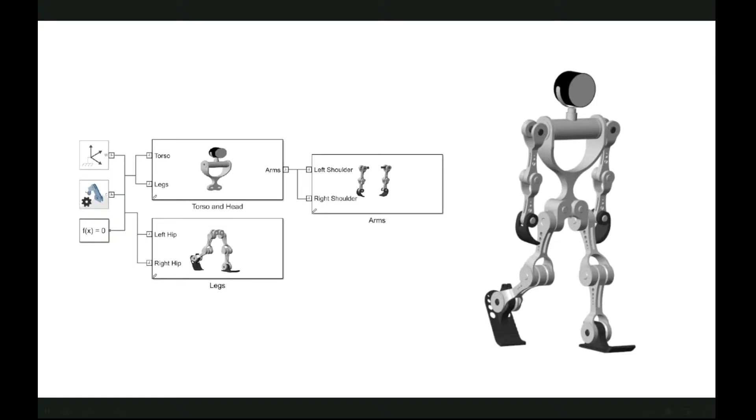Hello, and welcome to Multibody Simulation Onramp. This course will introduce you to modeling and simulating 3D mechanical systems using Simscape Multibody. Which is nothing but the degrees of freedom in robotics. In our rapidly transforming world, driven by electrification and automation, understanding the dynamics of systems with multiple moving parts.

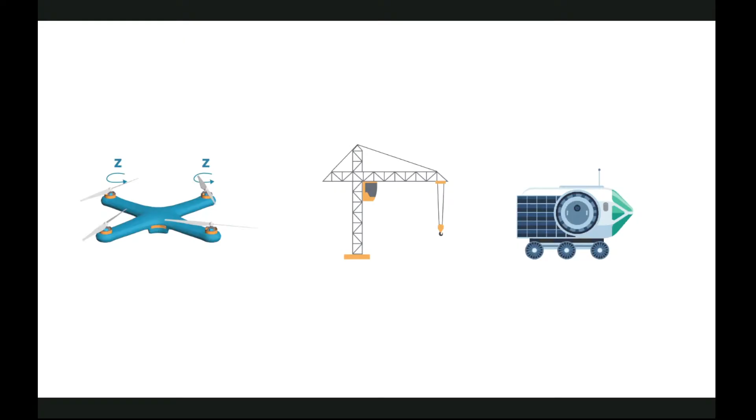So basically it is the same concept as I told you, that from these courses we can understand what a system really does or what is meant by a system. So to understand the dynamics of a system, we have to learn about the system. For that, MATLAB courses are perfect because they are free and they clear the mindset of an individual or a student who needs to be focused on robotics. Has become more crucial than ever. These systems are everywhere, like drones executing complex flying patterns or rovers.

So basically, when I did the PID control, which is nothing but a control system program in Simulink, I understood that a drone is not just about motors and ESCs, which control the whole motion or the position of the body, but it is also a systematic, or you can say high-level, mathematical calculation which integrates with integration, probability and differentiation. So modeling is nothing but pure mathematical concepts.

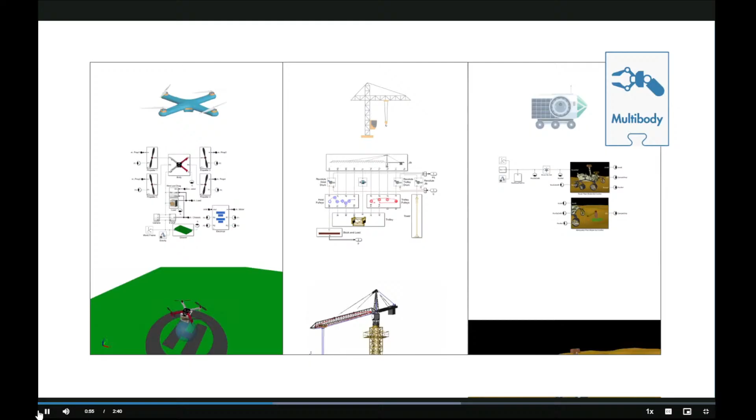Exploring uncharted terrains on alien soils, and even heavy construction equipment tirelessly shaping cities. Our world is indeed a dynamic stage teeming with increasingly sophisticated machinery. But how do engineers make sense of the intricate movements of these complex machines? By mathematics. This is where Simscape Multibody comes in. With this powerful tool, you can model and simulate almost any mechanical system you can imagine. Think of Simscape Multibody as a virtual lab.

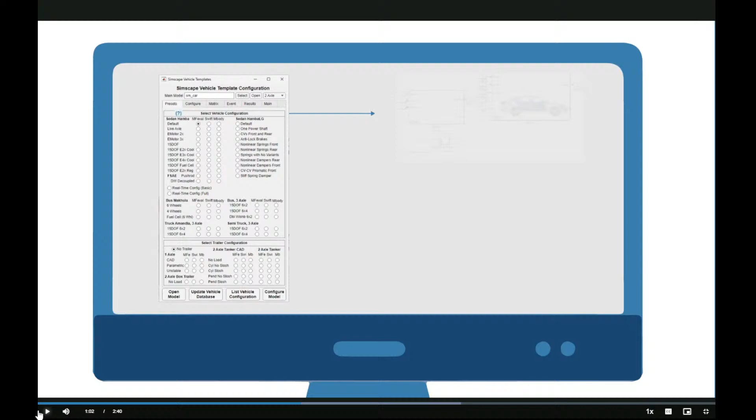Just think about it. You are sitting on Earth, you are programming or developing a model on a PC, and you can calculate what the system will do if it is on the moon surface or the Mars surface. So it is fascinating, and these fascinations can also lead towards learning. Where you can experiment safely and gain valuable insights through simulations.

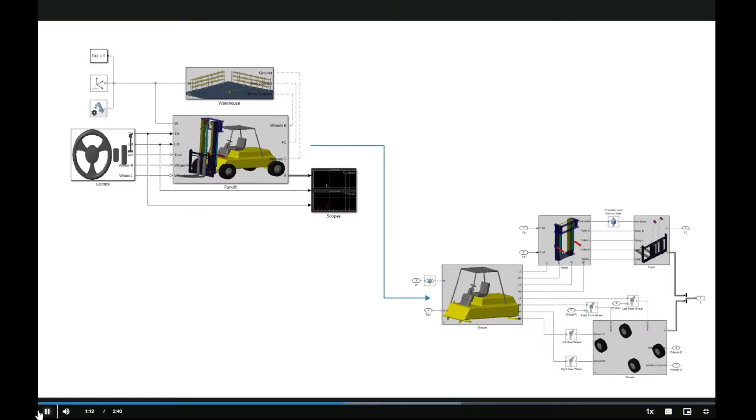For instance, picture yourself designing a forklift in Simscape Multibody. You can test how fast it can move, how much weight it can lift, and even assess the risk of it toppling over, all without investing time and money in physical prototypes. That's why Simscape Multibody simulations are the main tool, or you can say key, for engineers who want to be designers, or you can say a high-level engineering tool.

So basically, what is engineering? Engineering is nothing but a research and development part, where the researchers are a completely different type of people who first do some research, make some discoveries, and based on that research and discovery, an engineer will calculate and make the proper system budgeting or the power budgeting or the system architectures.

Then that data will be taken to the next engineer, who will do the mid-level engineering, meaning building a prototype, doing some debugging in code, errors, doing code, doing debugging, and after that, when the code and the hardware prototype is completely ready, then that part will go towards the low-level engineer, who will just manufacture the product.

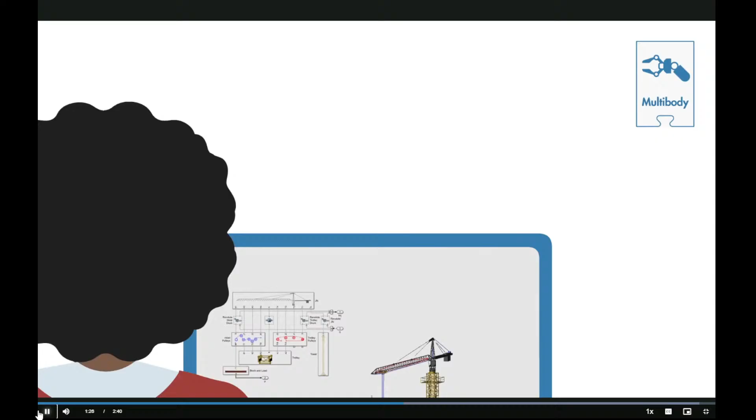So basically, you can say that the high-level engineer will make the architecture and will do the system analysis. The low-level engineer is nothing but a laborer or manufacturer who will manufacture the product, and the mid-level engineer will take the data from the high-level engineer and convert that data into a prototype based on which the manufacturing will be done.

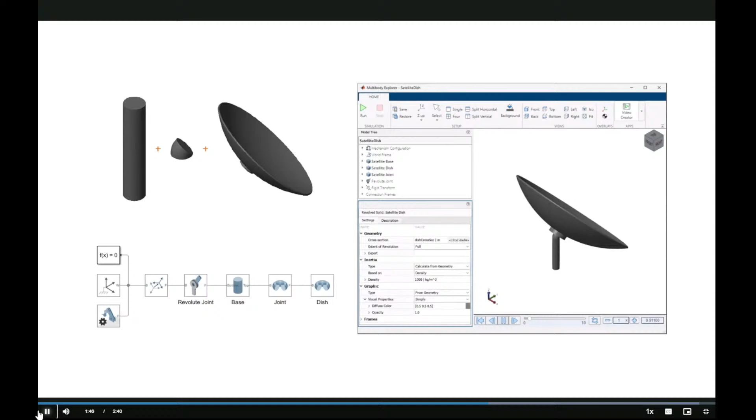Empowers you to run these multi-body simulations, providing a cost-effective way to anticipate and prevent accidents, fine-tune system performance, and boost equipment safety and reliability. In this course, you'll learn how to piece together 3D bodies into articulated mechanical systems. These models come to life in the Mechanics Explorer app, where you can visually explore your multi-body creations. Additionally, you'll get hands-on experience with actuating your system using forces and torques, prescribing joint motion.

See, it is pure mathematics. Just think about it: you are using an ESP, or other microcontrollers, and you are connecting that ESP to a phone which is connected to a cloud server and a proper website. The website will contain a proper ML model which can read your hand movement, and based on that hand movement, the model inside your computer will move. Just think how fascinating it is.

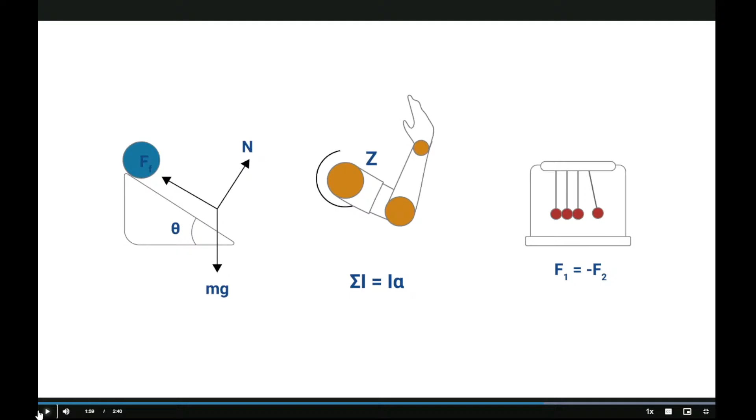Or you can also think about it like you are building a proper satellite without needing any type of external components, just proper mathematics and a simulation. Oof, it is so fascinating for me, and I am getting goosebumps just thinking about it.

Motions and modeling contact forces between bodies. And in the final project of this course, you'll model and assemble a robot arm capable of sketching a variety of technical drawings.

So this is the basic model, and I will tell you one story about when I visited the RTMNU Expo this year. The college students had made this line sketching robot, and now if I am learning something new and my basic project will be that project, then it will boost my confidence, I guess. Okay, so let's start with the course and we'll chat less.

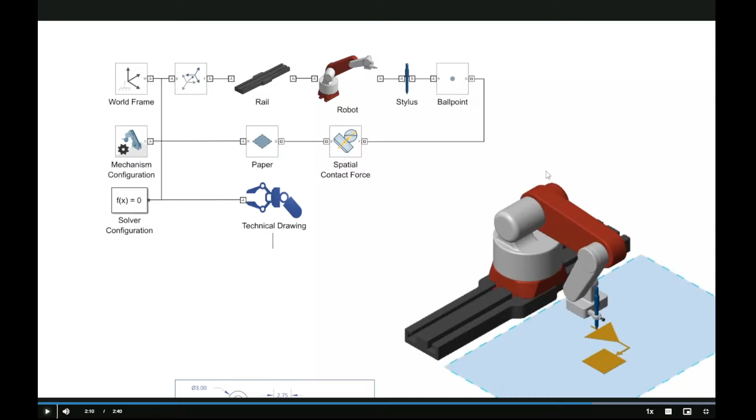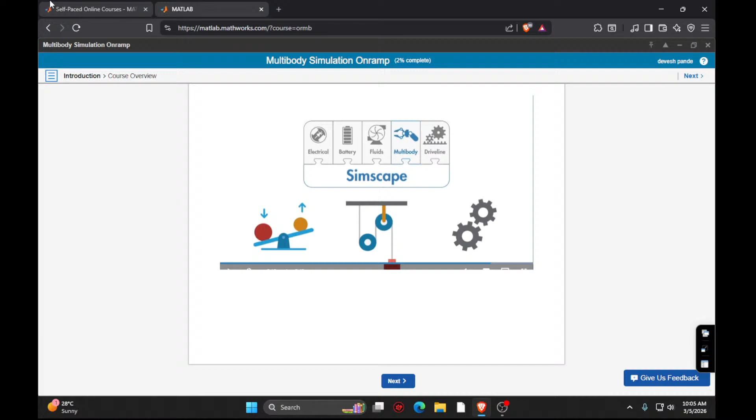Okay. Based on a blueprint. To make the most out of this course, you should have a basic understanding of mechanical systems. So first of all, I know about fluids, I know about electricals. I don't know about batteries and drivelines. So is there any course related to this? If yes, then I have to do it. Let's see.

So what will I do? I will go to the multi-body simulation onramp, and I will see the recommended course I have to do here, Simscape. Obviously I have completed Simscape, so I don't think that I need the basic modeling of physical systems in Simscape, drivelines and battery and electricals. If you need to refresh your knowledge of Simscape, okay, power system and circuit simulation are necessary, consider taking Simscape Onramp first to gear up for the journey ahead.

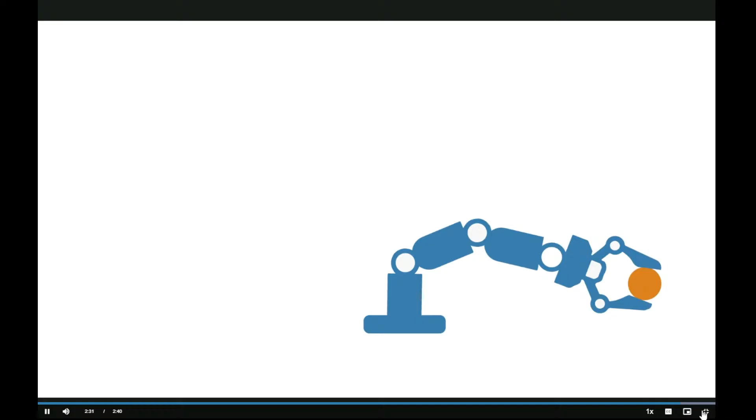So, are you ready to explore the fascinating world of multi-body simulation? Yes. Enjoy the course. Seeing the objects which are moving because of maths is the next level dopamine for me. It's like an addiction.

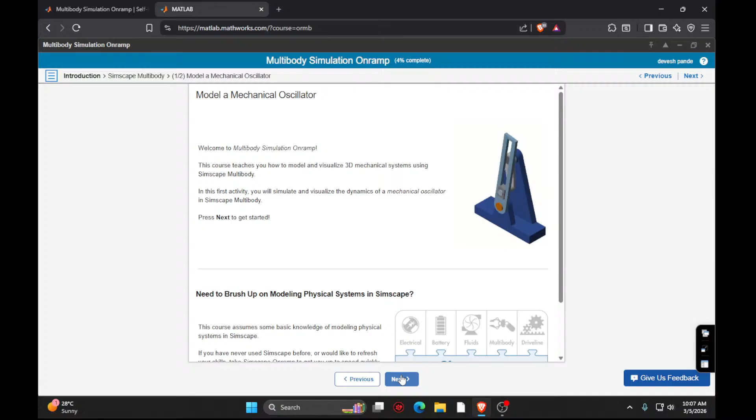Model a mechanical oscillator. So welcome to Multibody Simulation Onramp. This course will teach you how to model and visualize 3D mechanical systems using Simscape Multibody. In the first activity, you will simulate and visualize the dynamics of a mechanical oscillator in Simscape Multibody. Okay, press next.

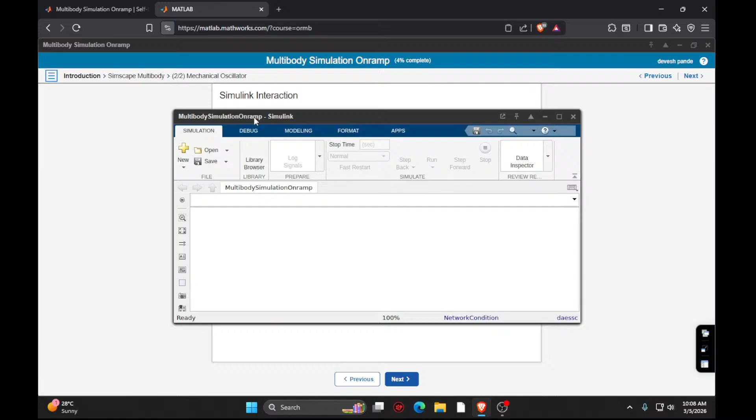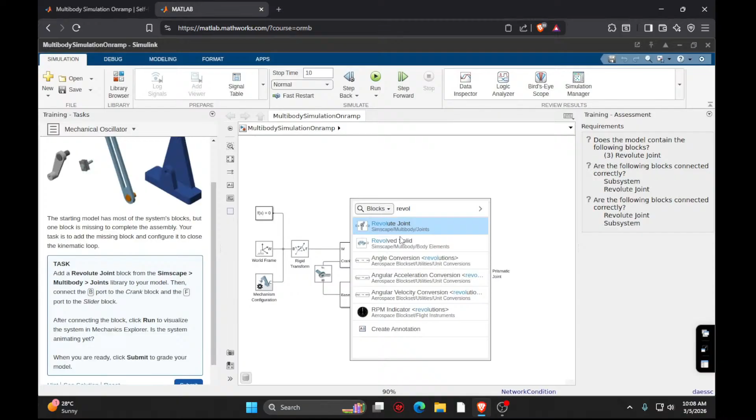This is a new course for me, and I'm very much excited for this type of course because I like proper mechanics and electronics. And when both are combined, that will be perfect. Okay, task. So I have to add a joint here, that is a revolute joint. I have to touch here, I guess.

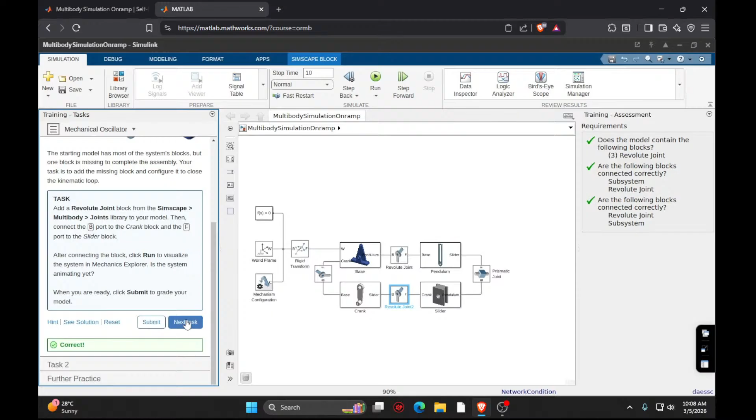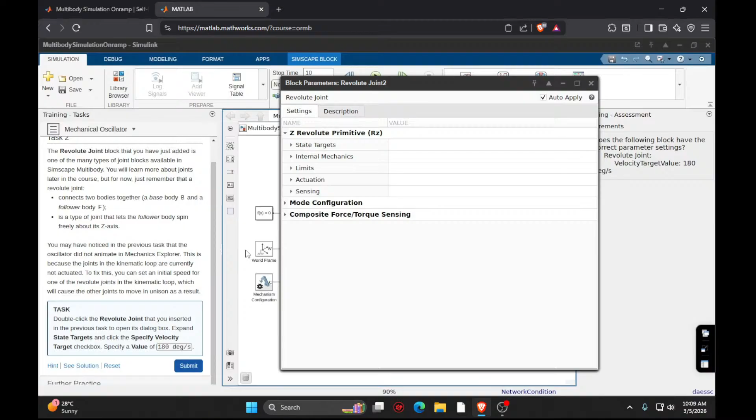So here we can adjust the parameters for the blocks. Double click the revolute joint that you inserted in the previous task to open its dialog box. Okay, expand State Targets and click the Specify Velocity Target checkbox. Expand State Targets. So where are State Targets? This, and check the Specify Velocity Target checkbox.

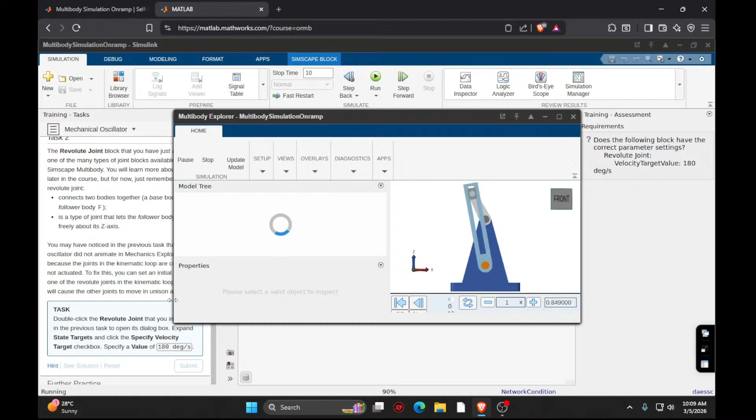Specify value to 180 degrees per second. 180 degrees. So it will go to auto apply. Yep, you can see the proper simulation here. It is

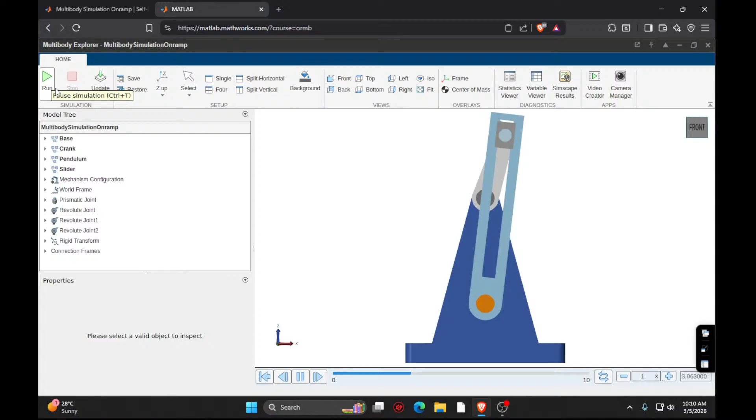Sorry, but I can't control my feelings here by just looking at this type of simulation. It's like a dream come true for me. I will make a video for this. This is called engineering, right? Again, let's start.

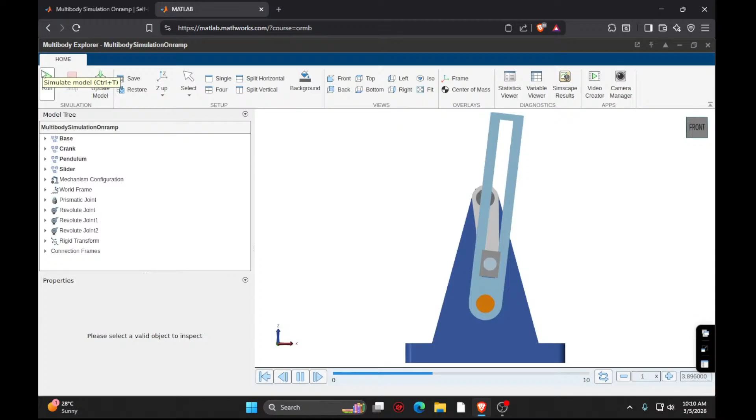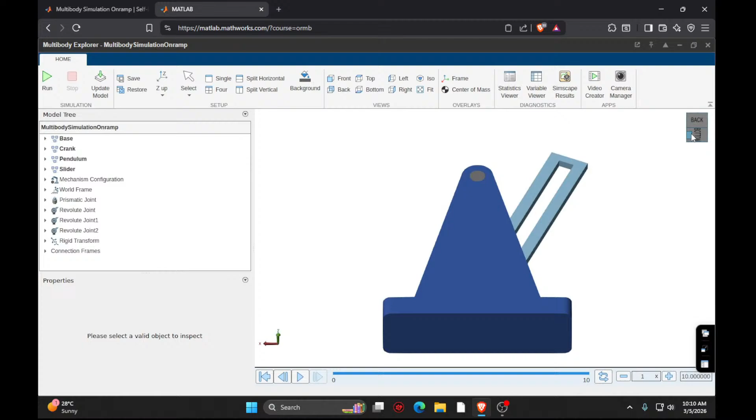Yeah, so you can see we can look at this type of front view. Okay, I can rotate it, and this is the back view, which is... so you can see your models in the Multibody Explorer in the apps.

This is too much fun a session for me.

Okay, so the first model is completed now. Model mechanical systems. As you already know, Simscape lets you model physical systems with behavior for multiple domains without deriving the equations yourself. Sorry.

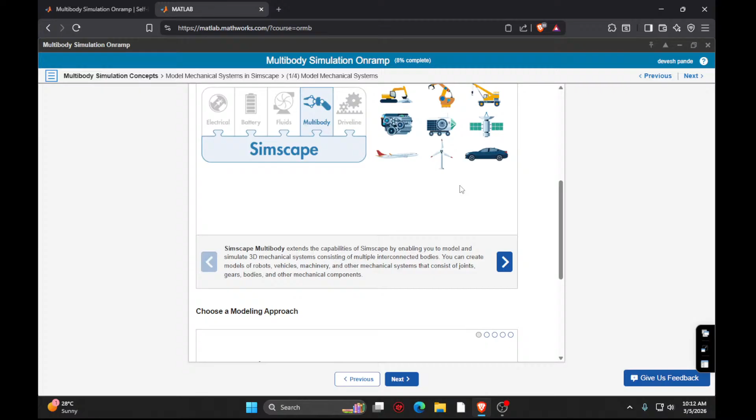Sorry for the disruptions. Let's see. First of all, I have to send some notes to my friend. Send that first. Okay.

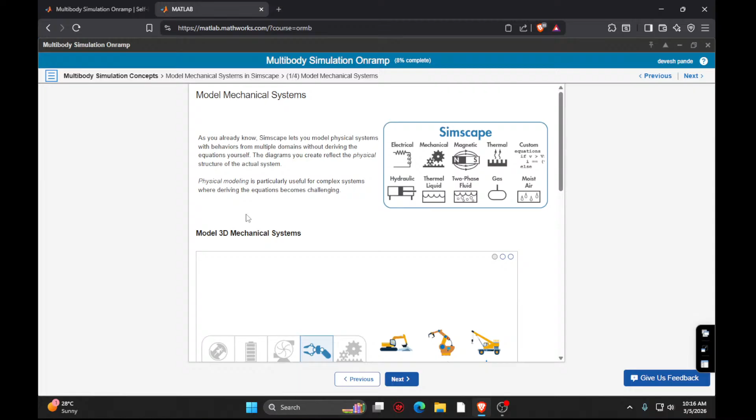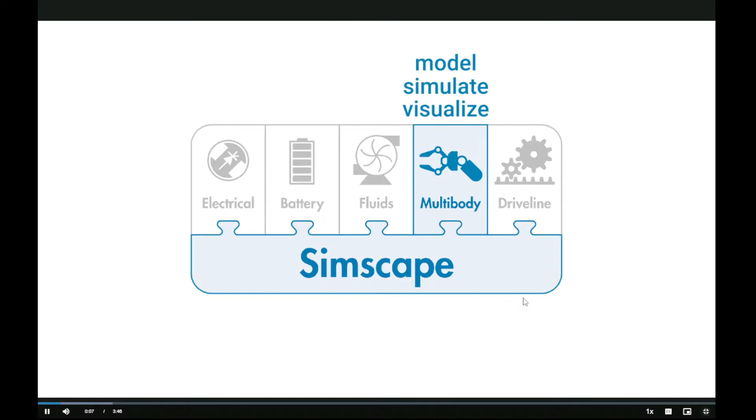So let's start with the course. Now we have to make proper kinematics. You can see this is the kinematics, model mechanical. I have to learn more about this type of Simscape kinematics here. Multibody brings the power to model, simulate, and visualize 3D mechanical systems right to your fingertips, all within the Simulink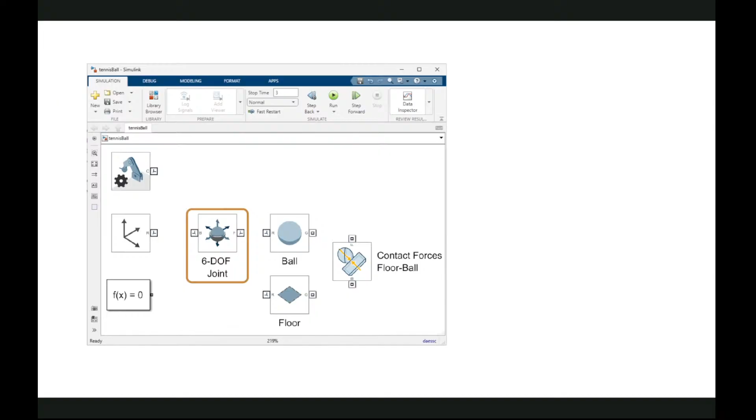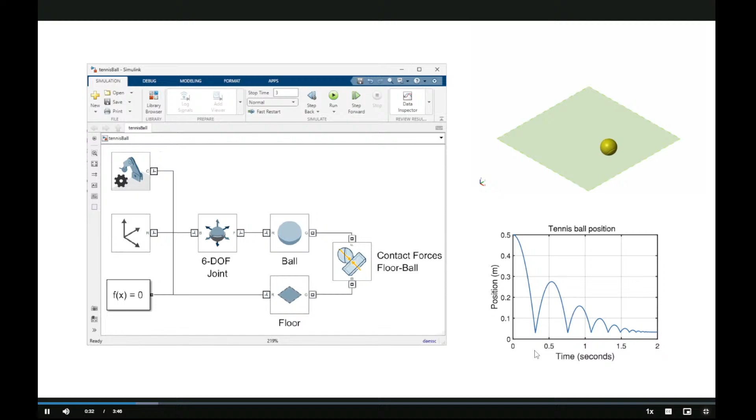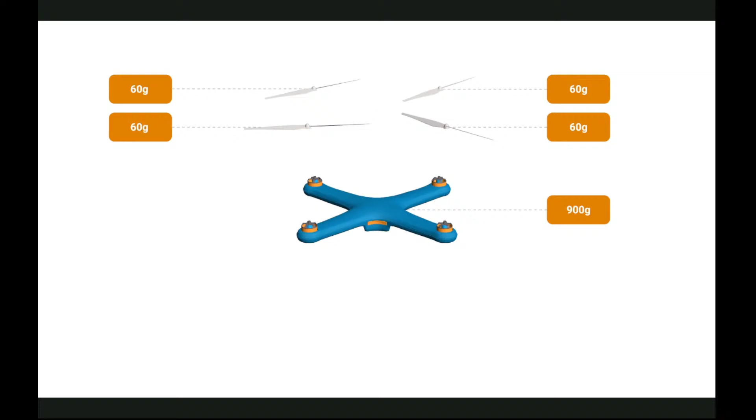environment. To model a mechanical system, simply connect blocks representing bodies, joints, and force elements into a schematic. When you run a simulation, Simscape Multibody handles the equations of motion and rotation matrices behind the scenes for you, so you can focus on tackling the engineering challenges. Now imagine you're building a quadcopter. First, define the bodies that make up the system. Each body is unique, with its own mass, center of gravity, and inertia.

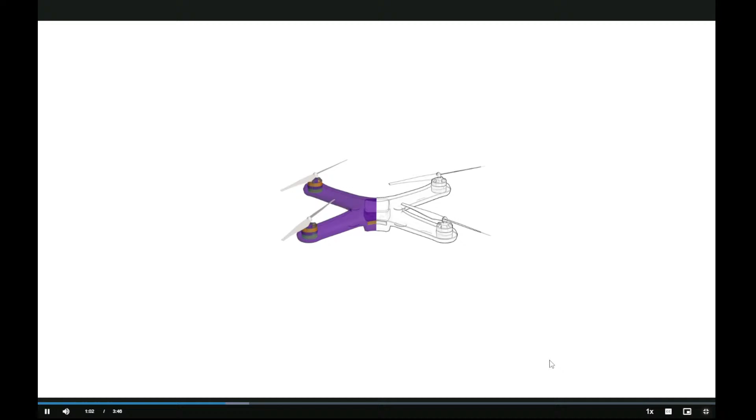Yes. And here's the fun part. You get to play fashion designer for your quadcopter. Dress it up in whatever colors are trending this season. Adjust the opacity of individual components. It's like having X-ray vision for mechanical systems. Yes. And with the Simscape Multibody Solids library at your disposal, you've got access to fundamental 3D shapes like bricks, spheres, and cylinders to build your mechanical system.

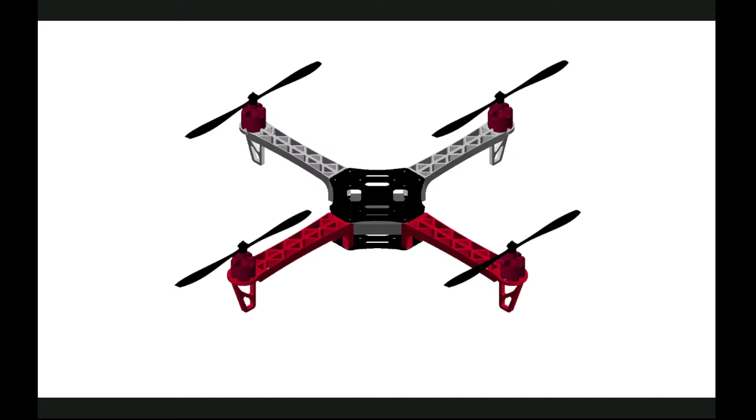You can even define custom 3D solids by extruding or revolving 2D profiles. So it is basically just like game development. And if you're familiar with computer-aided design software, you can import entire CAD assembly files directly, saving yourself from the grind of building complex models from scratch. Simscape Multibody automatically extracts necessary information, such as part dimensions and density, to fuel your multibody simulations.

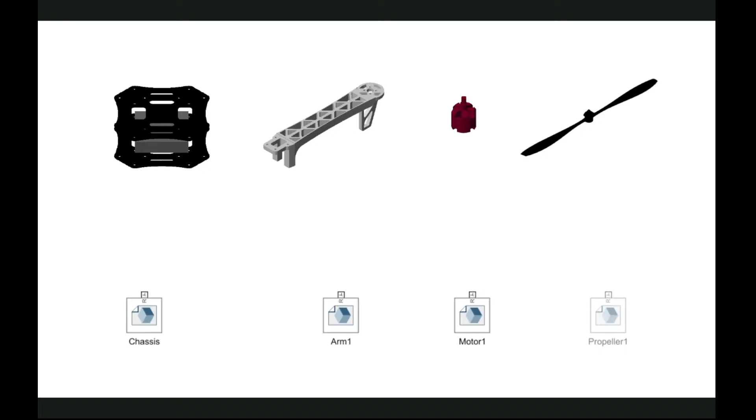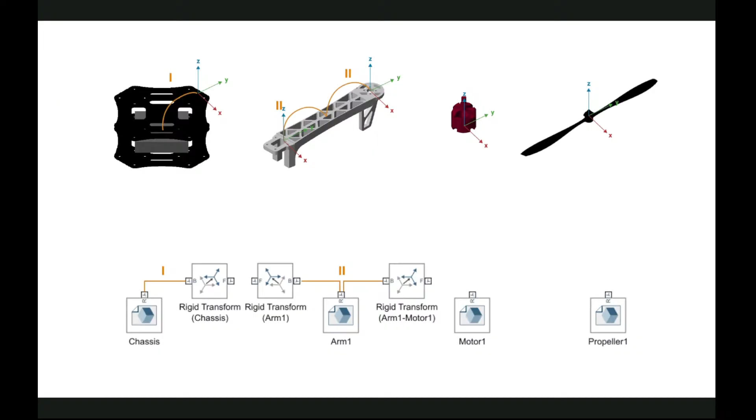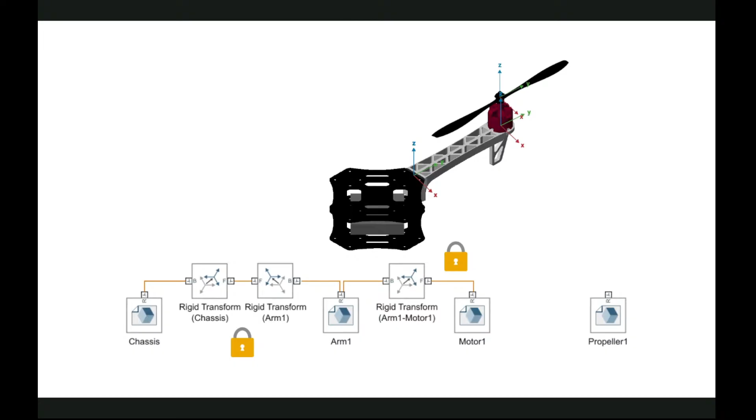Once you've defined the bodies that make up your quadcopter, you proceed to the assembly stage. Each body features a default attachment point, called the reference frame. Okay. But if you've got other locations in mind, the Rigid Transform block has got you covered. This nifty block lets you adjust the relative position and orientation of a frame. When you connect two bodies together at their frames, they become as rigidly bonded as if they got superglued, creating a secure, immovable connection. Now, for parts that require a connection with some mobility, joint blocks let you specify how bodies move relative to each other.

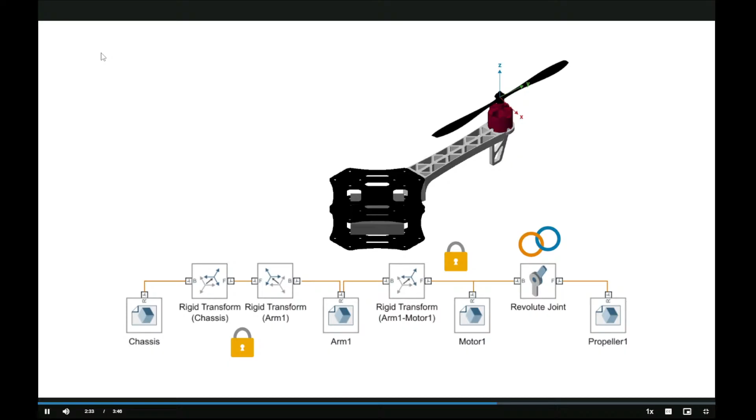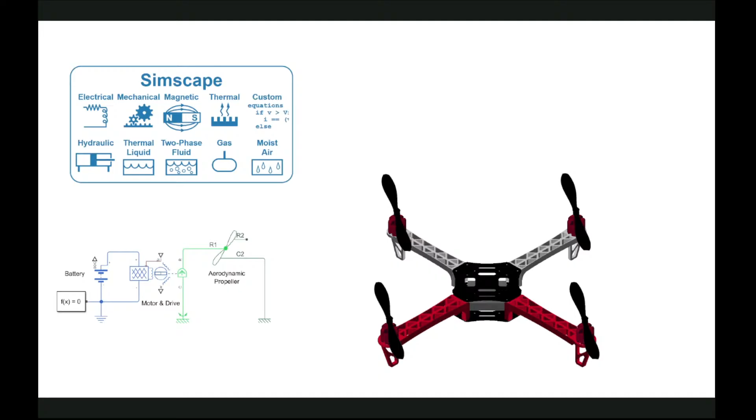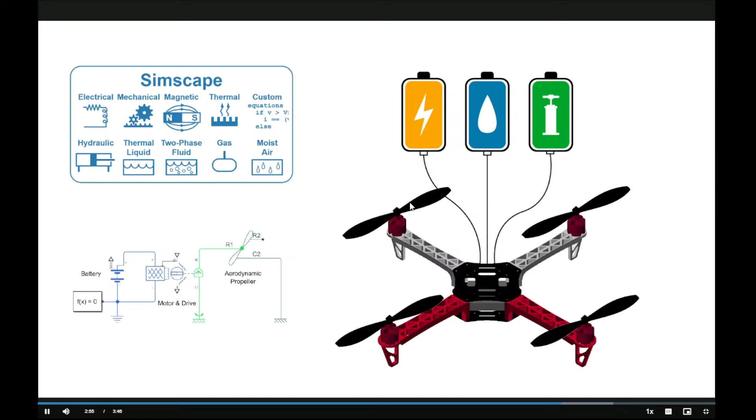Where the rings are replaced by joints, connected yet allowing some movement. For example, a revolute joint enables a body to rotate about a single axis. And since this is a Simscape model, your quadcopter assembly can seamlessly tap into electric, hydraulic, or pneumatic energy from existing Simscape networks. This is the proper mathematics. This also gives you the versatility to model additional physical effects like heat transfer and battery depletion over time, enabling you to run high-fidelity, multi-domain simulations of your system.

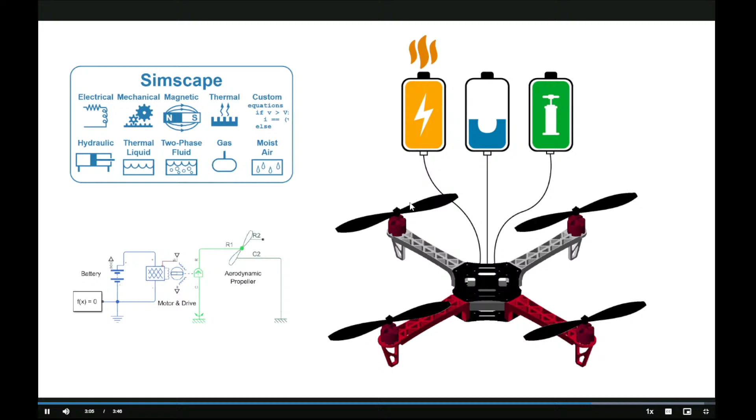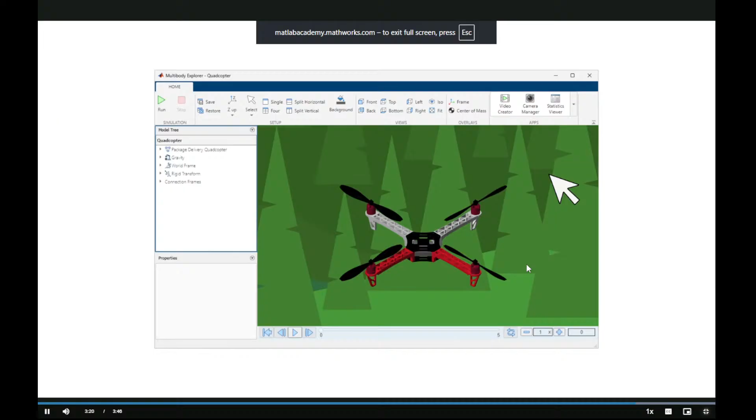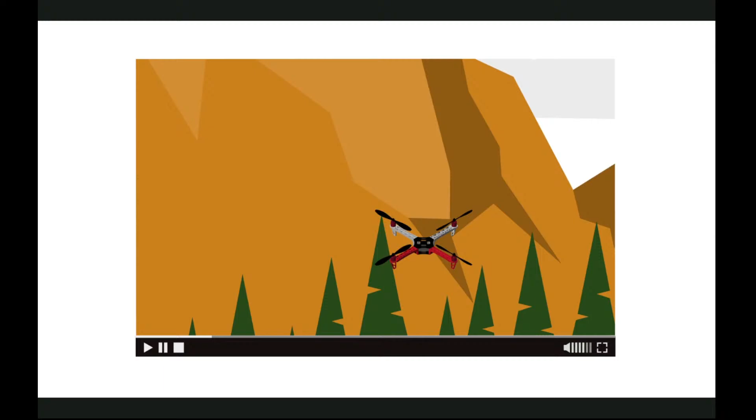Now that you've assembled and actuated your system, it's showtime. Hit the run button and behold your quadcopter's first flight in Multibody Explorer. Watch the action as it unfolds, and immortalize the moment by exporting the animation as a video. And there you have it. From concept to virtual flight, you've just witnessed your first multi-body simulation. And this is how we can make a drone. Now it's time to try it yourself.

Models. This is a proper new thing for me. Block required by the Simscape multi-body solver configuration. Simscape mechanism configuration and world frame. Multi-body. With this I can make up my proper own satellite.

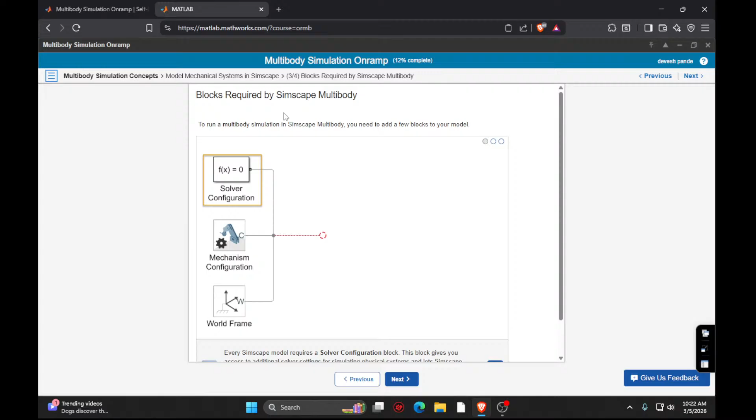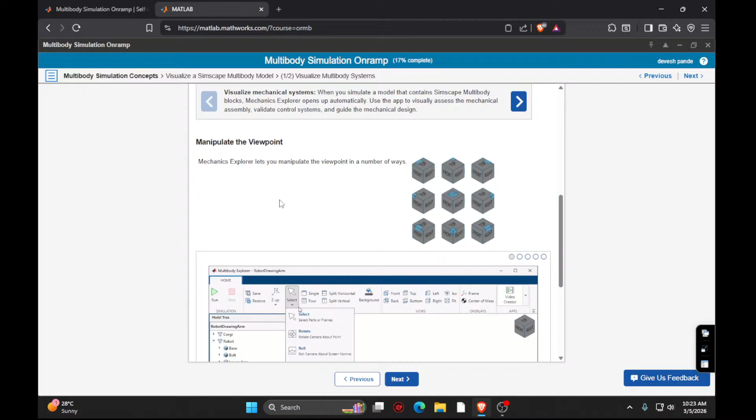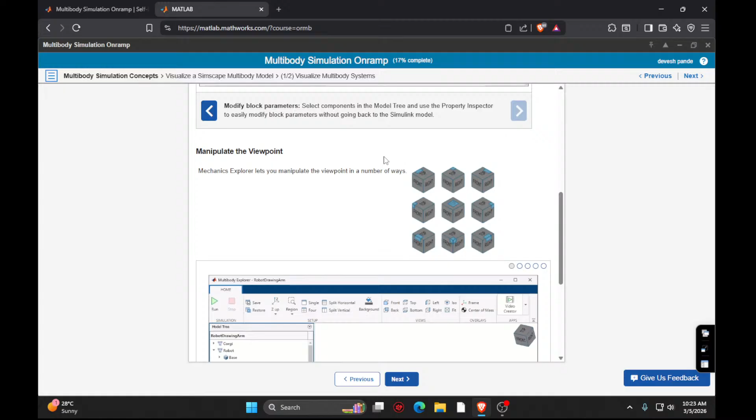So now we have to make the sketch robot, and for this, a closer look at the Multibody Explorer. You can see the run button there. Okay, and this is the multi-body explorer where I can see the simulations. Okay, this will be the part. It is like making a game. That's why everything you learn. Yes, I know about this. I can rotate, I can zoom. This is like a CAD. So basically, the time I have invested in game development will be useful for this.

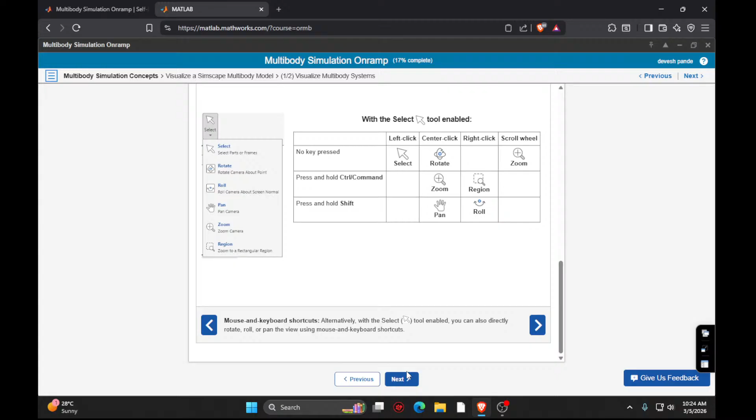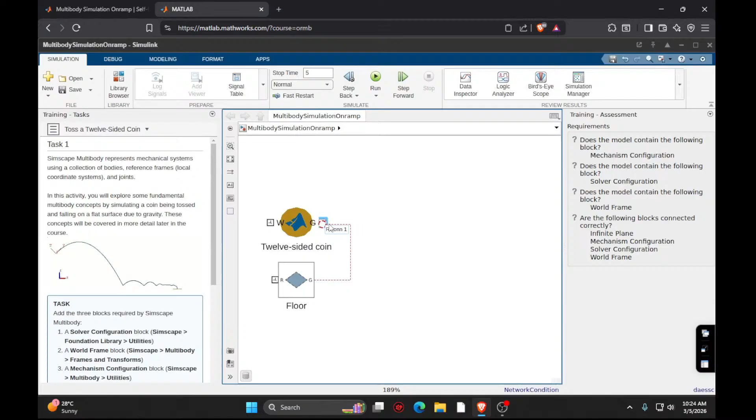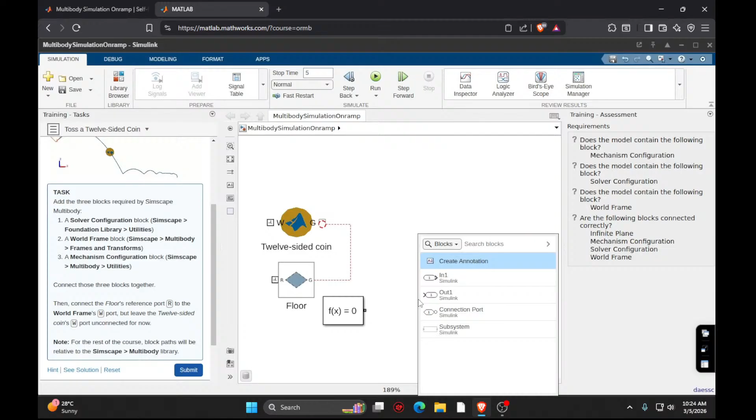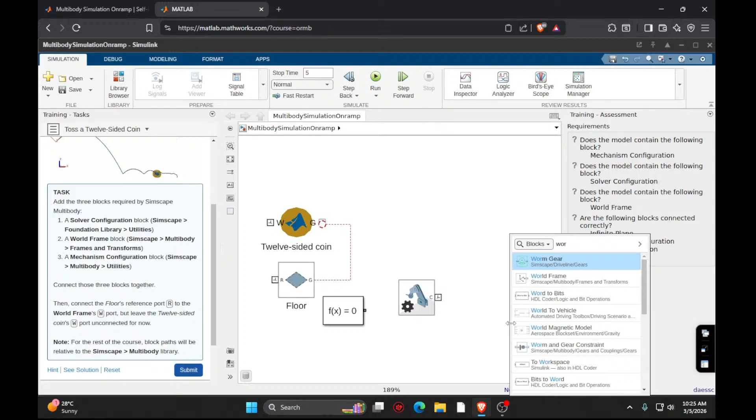Okay, start. I will complete only this exercise. Okay, so this is a coin flipping configuration. This is connected, right? This is connected. Now what we have to add is the solver needed for simulations, Simscape mechanism configuration, and world frame. We have to connect this to this part.

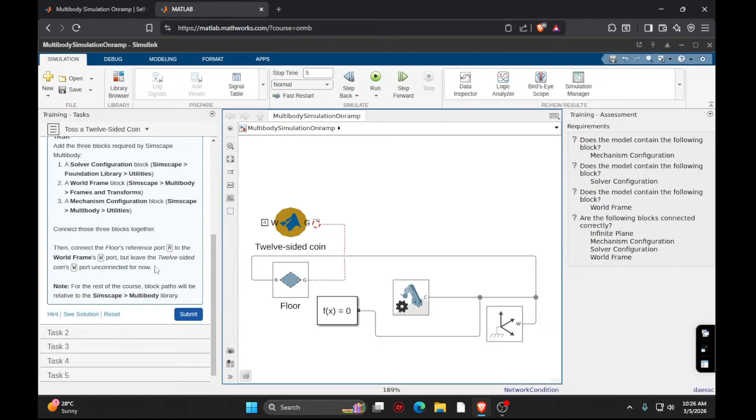Okay, add a solver configuration block, world frame and mechanism configuration. Connect those three blocks together. Okay, I've connected those three blocks together. Then connect the floor reference R to the world frame W port. Yep. But leave the coin's W unconnected now. Next.

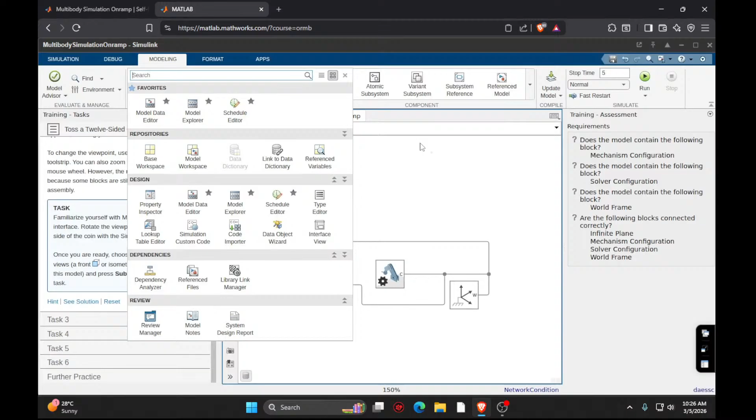Familiarize yourself with Multibody Explorer interface. Rotate the viewpoint to see the reverse side of the coin. So for this I have to go to the modeling, and after that, no, I have to go to Multibody Explorer. There is no Multibody Explorer here. Simulations, there is no Multibody Explorer here.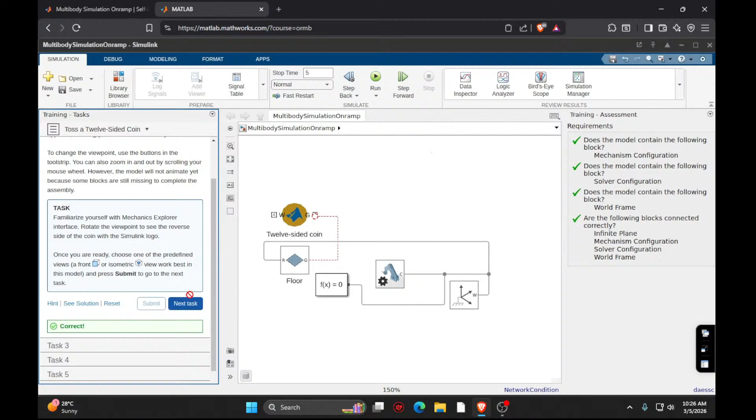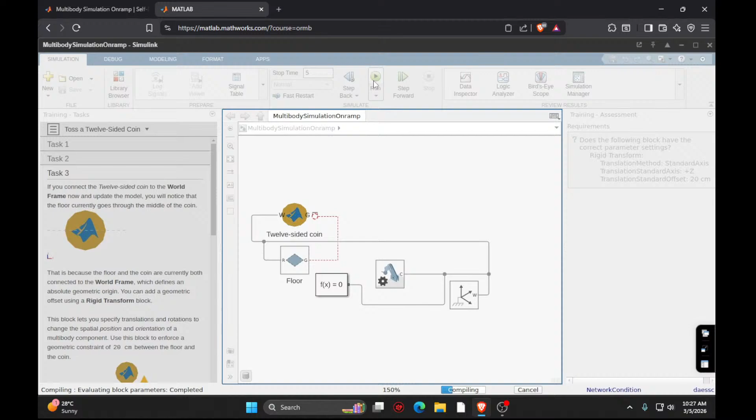If you connected the coin to the world frame, I connected this to the world frame and then I click on run, I can see that the coin is between the floor. Yep, you're right about that. Now the task, add a rigid transform here. Rigid transform, world frame, and follower.

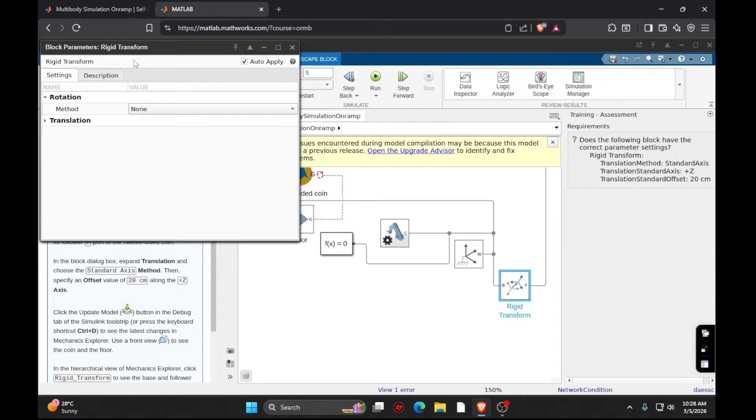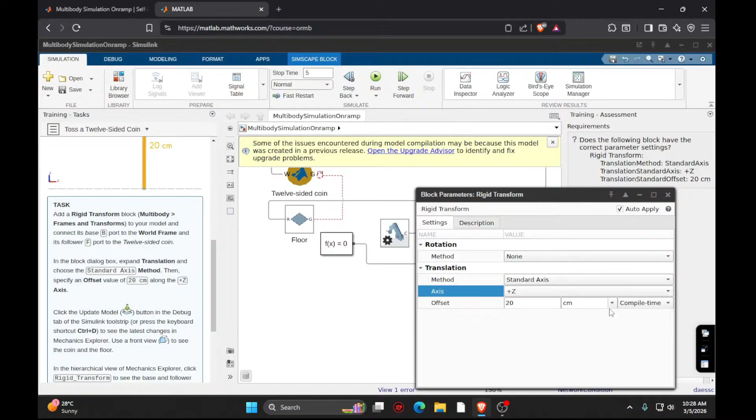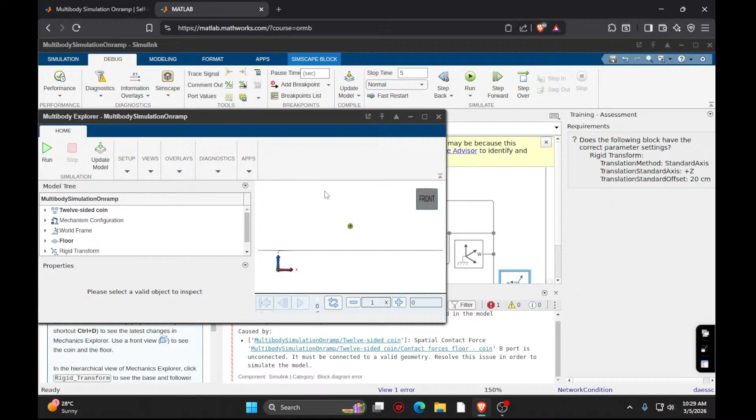In the block dialog, expand the translation and choose the standard axis method, then specify the offset value to 20 centimeters along the plus z axis. Okay, click the update model button. There is no option here. Click update model here. Now I can see the coin up front, but there is again one error. We have to solve that.

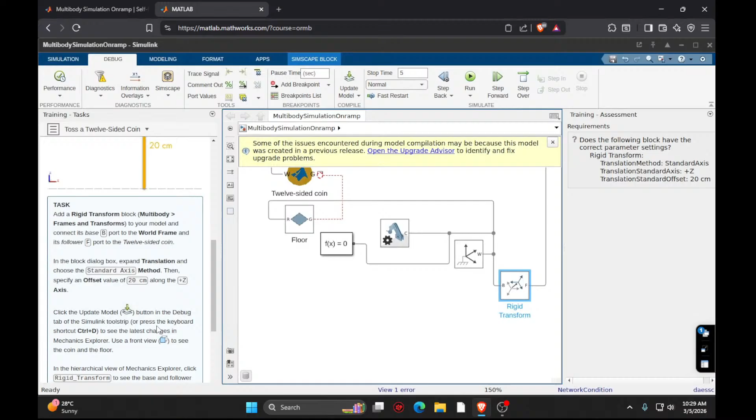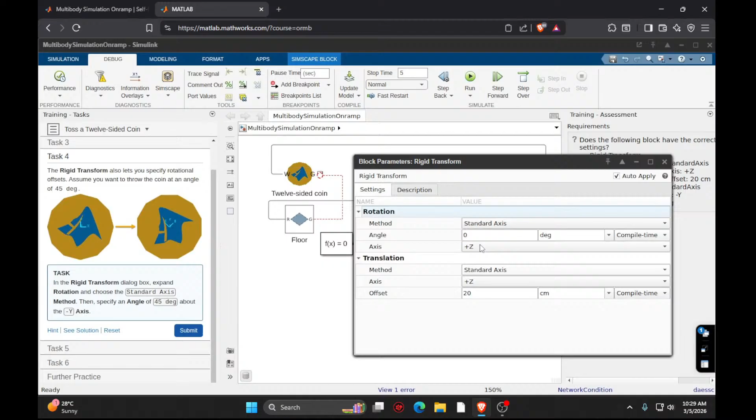In the rigid transform, expand the rotation. It is already expanded. Again we have to go to the standard axis method and set the angle of 45 degrees about the minus y axis.

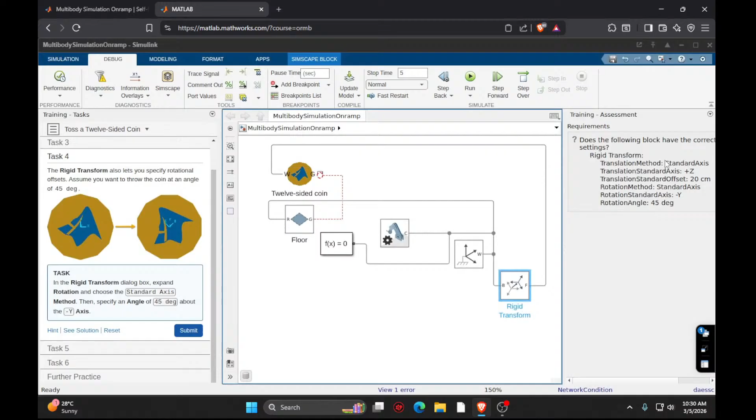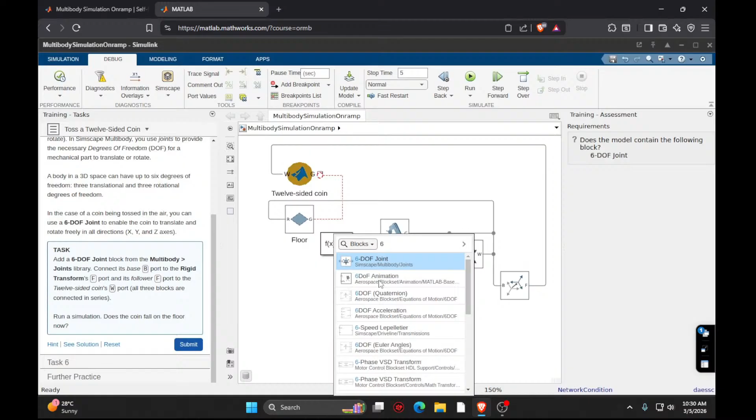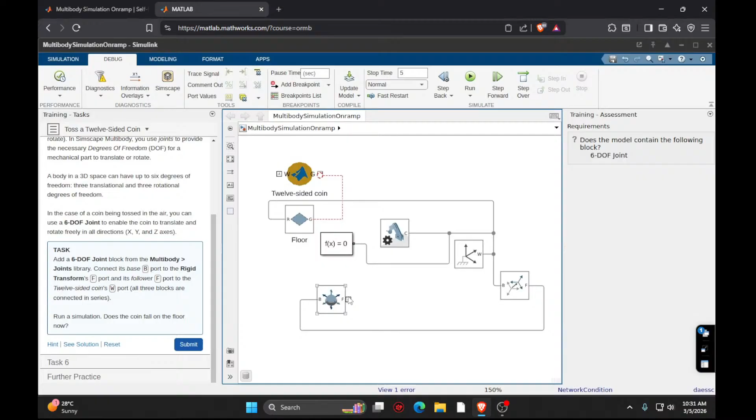Next, add a 6 DOF, which is nothing but a 6 degree of freedom joint. 6 DOF joint. Connect its base B to the rigid transform F. Okay, and this to this. Let's see the coin. Okay, so I think I have to cut this part. Yeah, I have cut that part, and then it's connected here. Okay, so I think we will see this later.